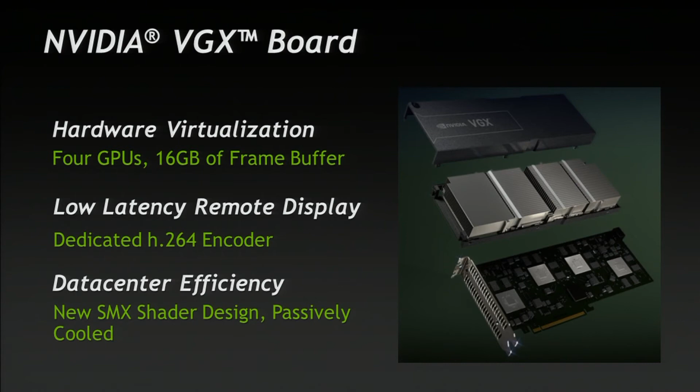And I actually have one here. We haven't launched this product yet—this is the first time we've taken it outside of NVIDIA, so you were the first ones to see the new VGX graphics card. Nice, compact, tight design, passively cooled for your data center. Afterwards you can come up and touch it and look at it, but you can't take it home because I only have a few of these in existence. I'll have to take it home with me because my engineers, hopefully they're not watching, are wondering where this card went since they have some work to do.

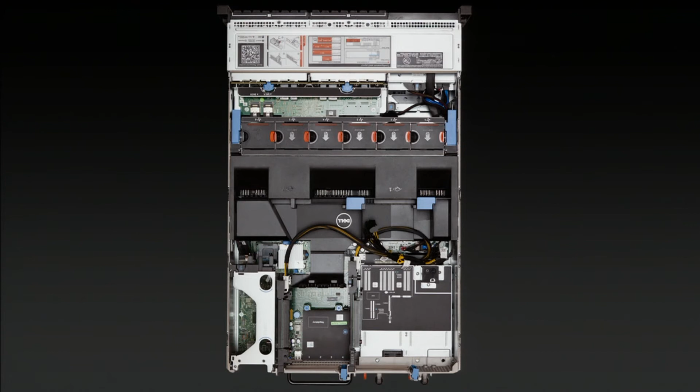This card is designed to fit into standard servers. This is a typical server, the Dell R720—Dell calls it their Swiss Army knife server. Does everything, goes everywhere. It's a great VDI server where they sell into that market today. We can take that standard server and put not just one card, but 2 of these cards in a server—standard server, x16 slot, 150 watts with a power connector.

This fits nicely into a Dell R720. If you're not a Dell shop, we also have other servers supporting VGX cards as well. We're working with Dell, HP, IBM, Supermicro. The new one on this list that you may not have seen before is Cisco. Cisco has never had a GPU-enabled server before. When they saw VGX, they said we should probably do a GPU-enabled server. So later this year, Cisco will launch their first GPU-enabled server.

Okay, enough talking from me. Let's look at what that performance, what that experience looks like from a virtual machine served by VGX. This first example is from Autodesk Showcase, a 3D CAD app used for review of designs. On the left is traditional VDI, no GPU behind it. On the right is VGX accelerated VDI.

We were going to install this and run them side by side so you can see the difference. When we went to install it, Showcase actually looks for a graphics device before it will install. In traditional VDI, it says, oops, there's an error—I can't find your graphics device, please tell me what your graphics device is so we can fix that. So these types of apps won't even run in a virtual desktop environment. But on the right, the VGX accelerated version runs just like it does on a normal desktop.

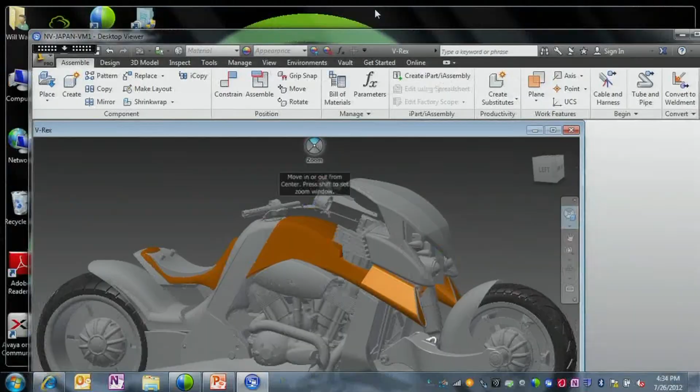At the risk of doing a live demo, I'm going to do a live demo and we'll see how well this works. This is my virtual machine sitting in the NVIDIA office down the road out here—it's not on site, it's a couple kilometers away, I don't know exactly how far the NVIDIA office is here, but it's not on site.

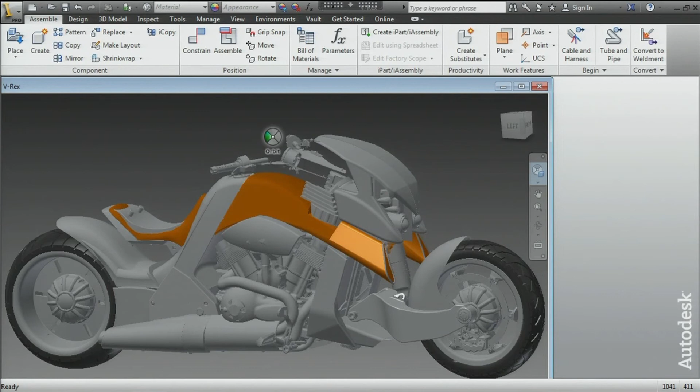We're connected through the network here, and this is Autodesk Inventor, a 3D CAD app. Traditionally pretty difficult to remote this experience, but with VGX we don't have any problems remoting this experience. It's just like a local feel. I have very good latency here, very low latency. The bandwidth consumption is actually pretty reasonable, so I can do it.

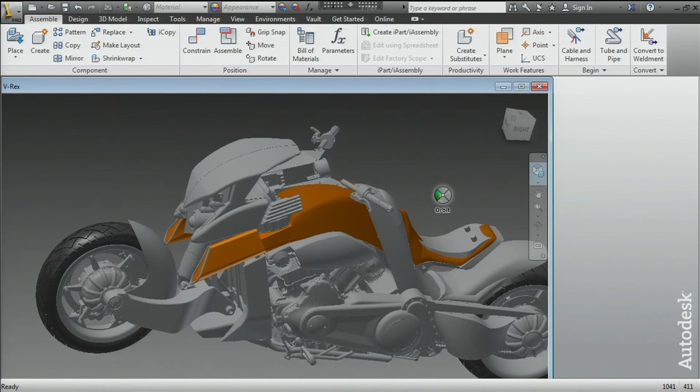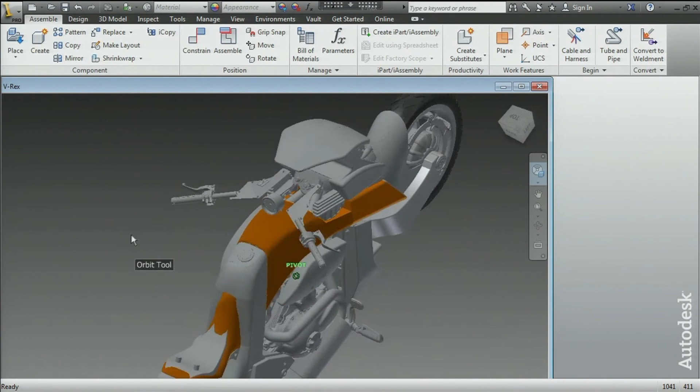As a matter of fact, I'm doing it over the wireless here—I've got no network connection, just doing it over our standard wireless here in the building, running my remote connection back to my workstation power in the data center. It works pretty good. It's not dropping any frames, it's not being laggy. I could actually work on this if I knew how to use Inventor. I don't know how to design motorcycles—I'd like to tell you I did this design, but it's not mine. It works pretty good.

So now I'm at work. I do this work all day long and I get this great design. And I want to go to a supplier because I need a part off of this thing. I want to take it to a supplier and show them, but I don't want to take my workstation with me—as a matter of fact, it's in the data center, so I can't take it with me.

So I just want to walk to the supplier with my tablet device that I picked up at the local store. I carry this anyway to read my books on or whatever. There's no NVIDIA technology in this, by the way—we've got nothing to do with this thing. But it works great as a receiver device, as a client device for VGX.

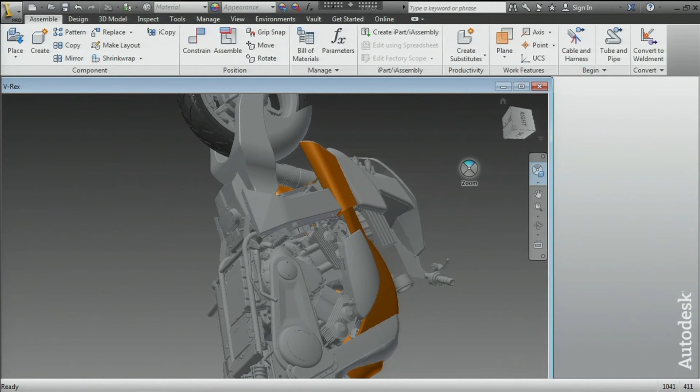I'm going to put it here under the camera, hopefully you'll be able to see it side by side up here. So we are going to connect, and this is using Citrix. Citrix receiver is available for Apple's iOS, Android, Windows, Linux, and Mac—you can pretty much install Citrix receiver on everything. I'm just going to connect by clicking on the app here, and it's going to bring up an option to connect. So now I can go to, let's do VM2—I'm actually connected to virtual machine 1 on my laptop here.

So if I connected to it again, it would log me out on the laptop and log in on the iPad. And that's OK, right? If I want to go use that same data set and show my supplier, that's exactly what I would do.

I want to show you that I can actually run 2 virtual machines on the same piece of hardware. So on the same server in our data center, we've got a second virtual machine set up. I'm going to log into that. I'll pull it away so you don't see my password. It's not my wife's name, it's not my dog's name.

So now we're connecting to that second virtual machine. Same server in the data center, same piece of hardware, but we've got 2 virtual machines running, each running a 3D CAD application. I promise, it's running a 3D CAD application.

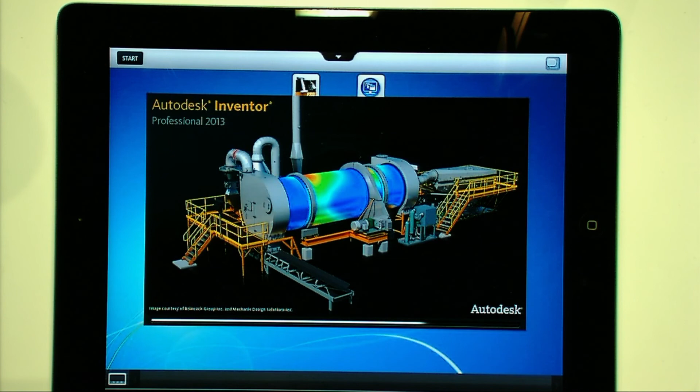Let me see if I can drive this here. There we go. We're going to kick off Inventor, a different session, a different virtual machine — a different virtual desktop for a different user, running again on the same hardware. I have a trial application, so I'll say go ahead and try it. It's going to boot up and take a minute to start, because Inventor takes a lot to load even on a high-powered PC. There's a lot of data to load.

No, I don't want any tutorials. I'm just going to open my model, and we'll try this cool-looking car thing here. OK, so this guy's still over here — he's alive, doing whatever he needs to do, right? Working just fine. OK, and now what's the problem? No, we're going to skip that this time. And it's coming.

So now, if I'm an IT administrator, I've got 1 machine to manage, 1 OS image to manage, 1 stack of applications to manage, and a data storage space to manage. It's a pretty simplified model, even though I'm extending it to all kinds of cool devices, and my employees feel really special because they get to use the latest and greatest stuff — and I don't have to support it. So now these cool tablet devices, everybody gets to use that.

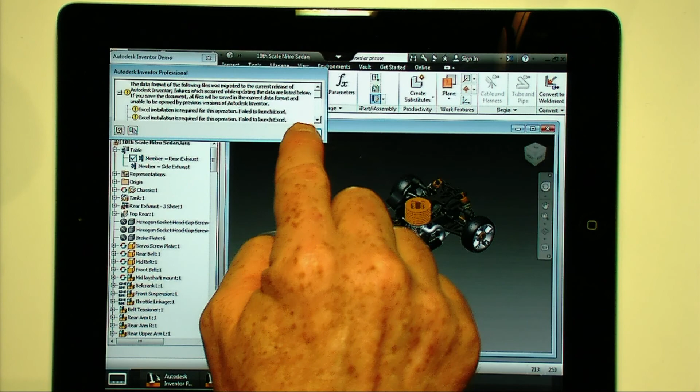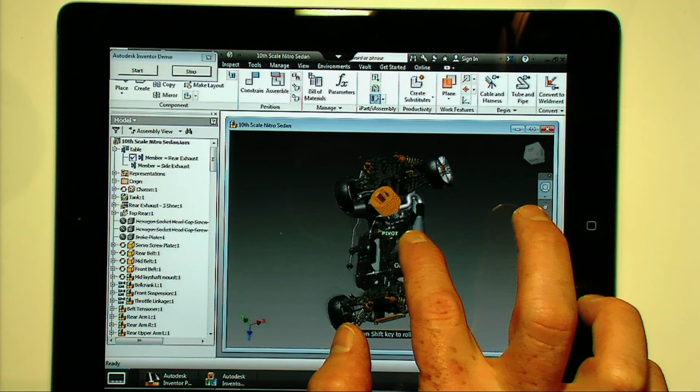Are we loading yet? OK, there we go. I'll go away. Now, you know that the interface on an iPad is going to be difficult to use to design a product. So we don't expect engineers to design on iPads, but we do expect them to be able to show their data and content from an iPad. I've got the same functionality here that I had on my laptop, and I get to just play with it, select a part.

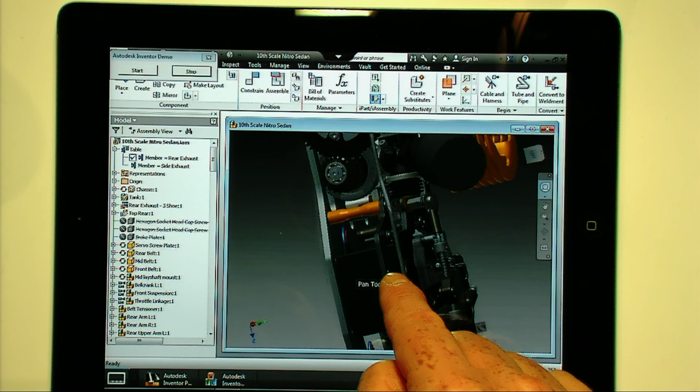I'm going to the wheel supplier, so I want to talk about that wheel and go to that supplier. I'm going to zoom in on that guy. Oops, I'm not fast enough. There we go — and I missed it, didn't I? Aren't you glad I'm not designing your car? There we go. OK, so now I've lost it, we'll rewind.

There we go. So now I've got two different virtual machines running on the same piece of hardware. Monday morning, we hire a new engineer — we've got a third engineer. As the IT manager, I just go ahead and create a new virtual machine with that engineer's name on it. I've got the hardware in the data center already, so he's off and running. I didn't have to buy anything new. Matter of fact, if he shows up with his own laptop, he's ready to go Monday morning without any new hardware purchase or anything on my part other than setting up that virtual machine.

OK, so that's VGX — that's the capabilities of VGX. We'll see this start rolling out over the next 6 months. VGX hardware is not available today, a VGX hypervisor is not available today, but they're coming. All those OEMs will ship VGX hardware within the next 6 months, and we'll start seeing VGX hypervisors in the next 6 months. Citrix has announced they will support VGX in their hypervisor in the next release, so look forward to that coming soon.